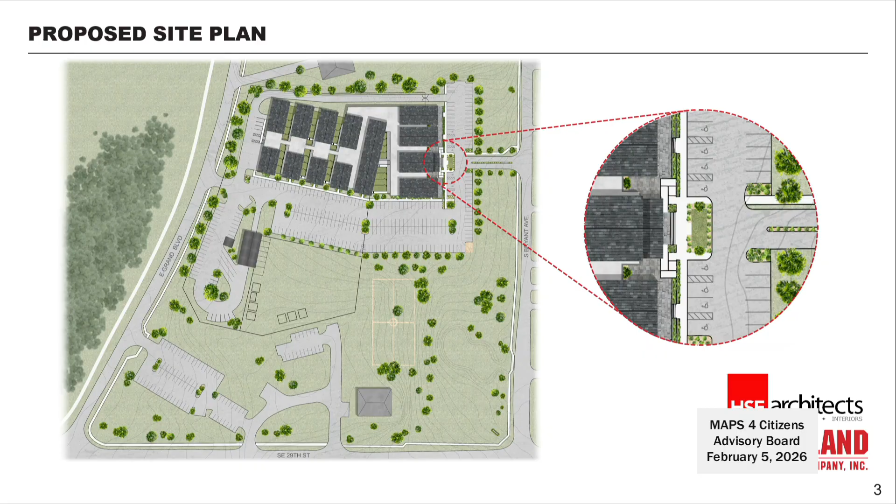Also to remind you, this building will be built in 2 phases. Phase 1 includes the main building on the very far top of this site plan. Then for phase 2, once phase 1 is completed, they will move out of the existing shelter into the new building, and phase 2 would be the removal of the existing building and the construction of the new large animal barn, parking, and horse pasture.

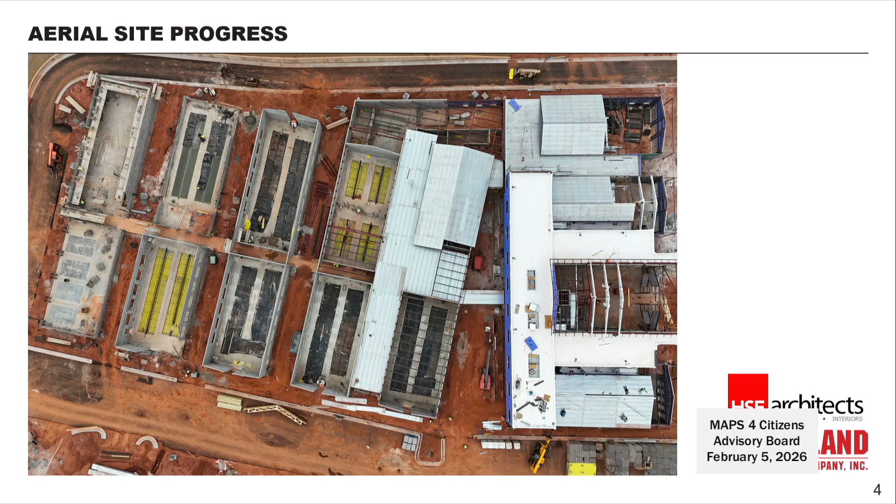You can see in this photo, the roofing—almost all of the walls are complete and the roofing is beginning to be installed there on the front half of the building. The silver part is roof decking that goes underneath the roofing, and the white part is the final roofing on those flat roof areas. So we're making good progress there.

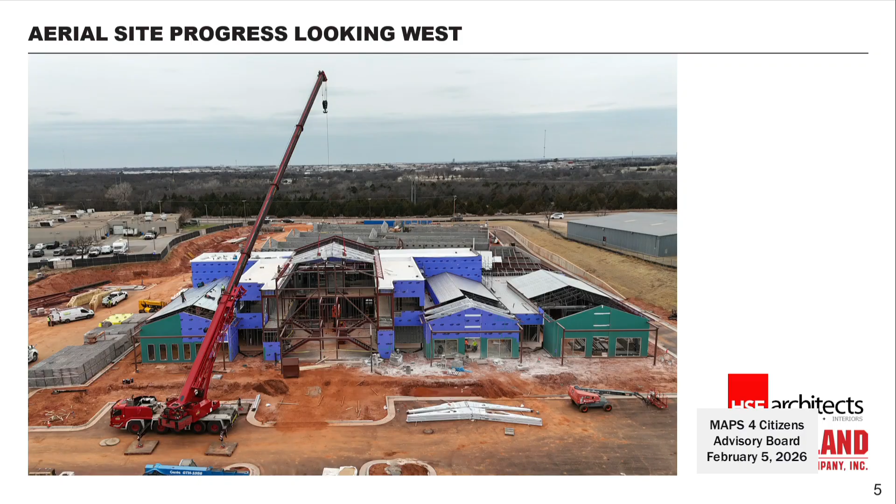Here's another shot, an aerial view from Bryant Avenue looking toward the west. Again, you can see on the very far left is the training room, which we are now calling Commons, and to the right of that is the two-story adoption lobby. To the right of that is the intake lobby, and then the clinic lobby on the very far right. To orient you, there's an existing Oklahoma City Police Department building on the very far right, which was existing to remain. On the very far left, in the background, is the existing animal shelter facility, which will be removed, and that's where the large animal barn will be installed.

In this aerial view, looking from the Bryant side toward the northwest, you can get an overall picture. You can start to see where all the parking lots will be. The concrete curbs and gutters are installed, and the light tan dirt areas will all become asphalt paving. On the far right, you can see where the main public entrance off of Bryant will come in. At the top of the slide, there's another entrance off of Grand Boulevard, where staff and animal control officers will come in and out daily.

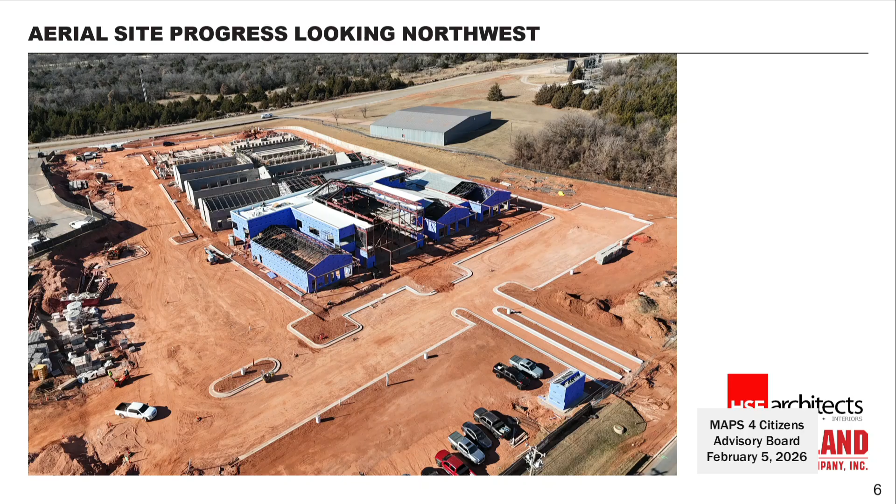Here's another look at the front. That's the two-story adoption lobby right there in the middle.

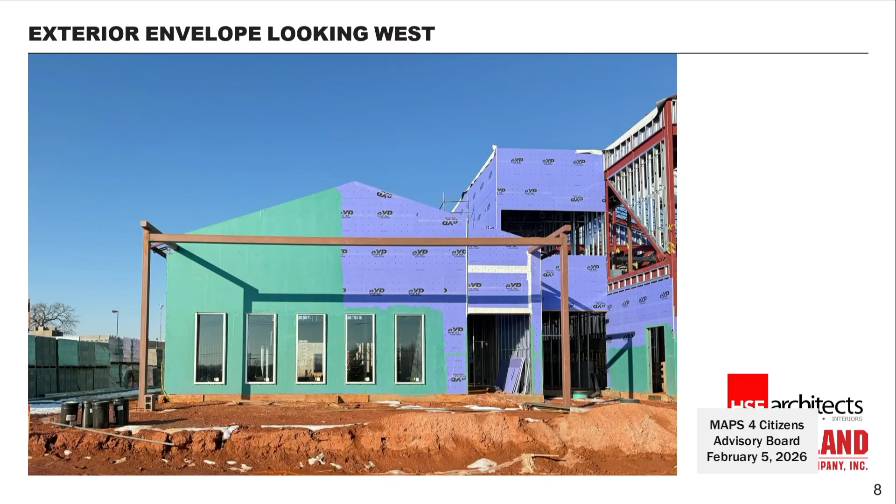This is a close-up of the commons area or training room. The purple you see here is not the final finish—we will not have a purple building. That's the exterior sheathing that goes up first, and then they apply this green liquid-applied waterproofing over top of that sheathing. The final exterior siding and concrete block will be installed over that.

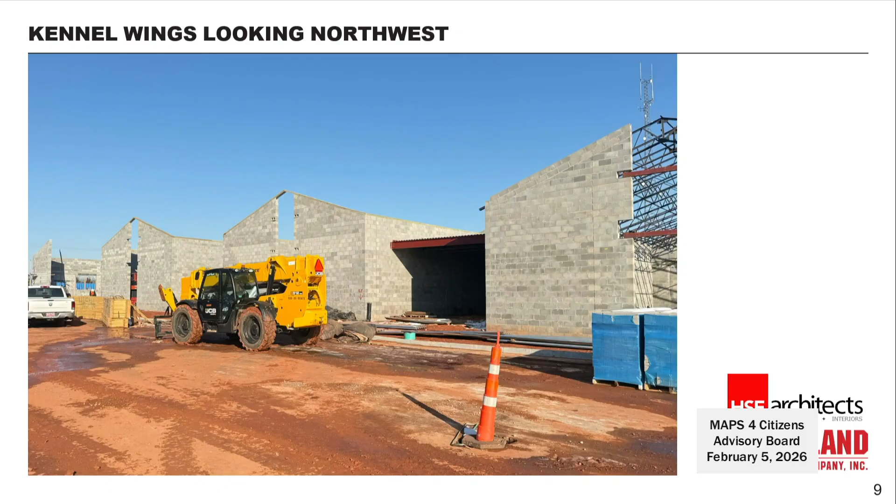Here's a look at the south end of the kennels. This is standing in what will be the south parking lot, looking back toward the kennels. You can see the concrete block work is nearing completion, and the steel roof structure is beginning.

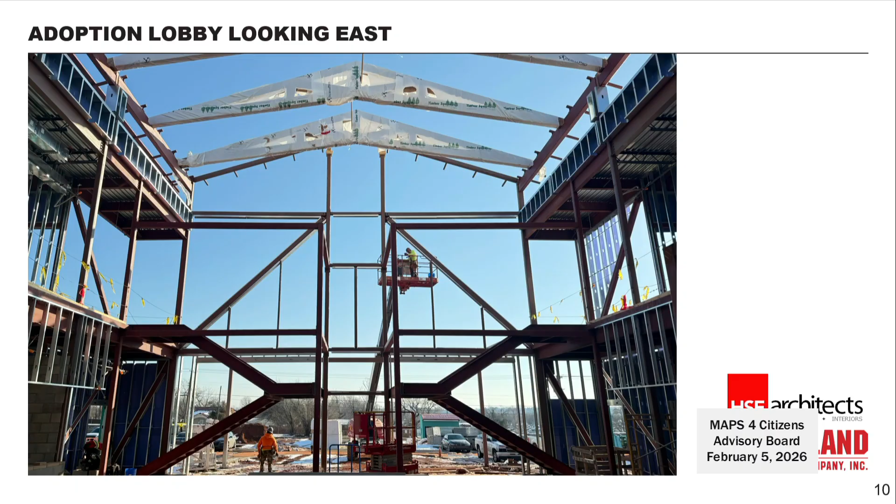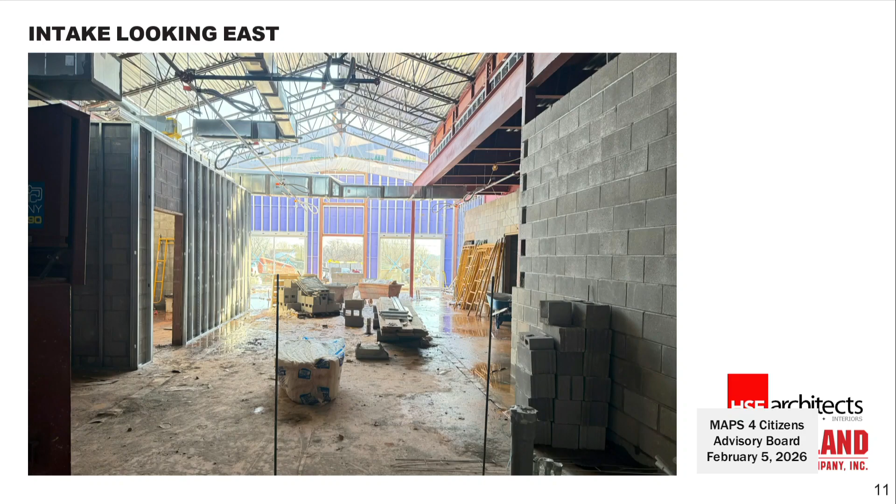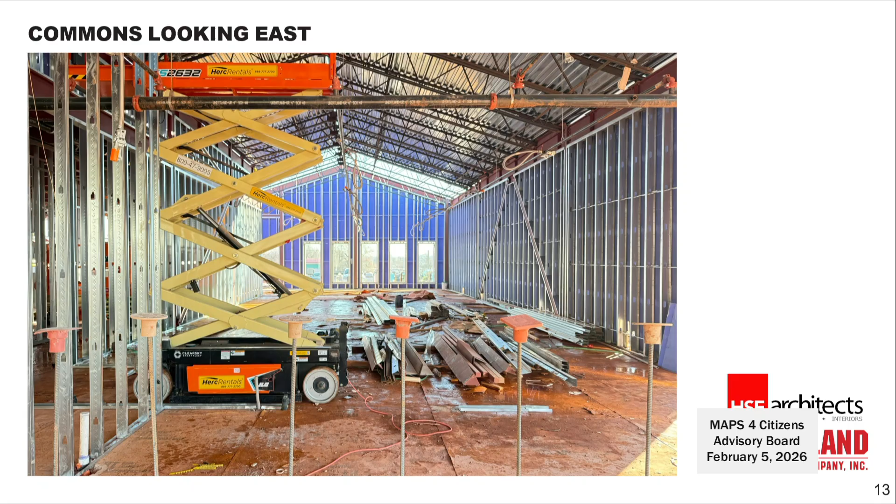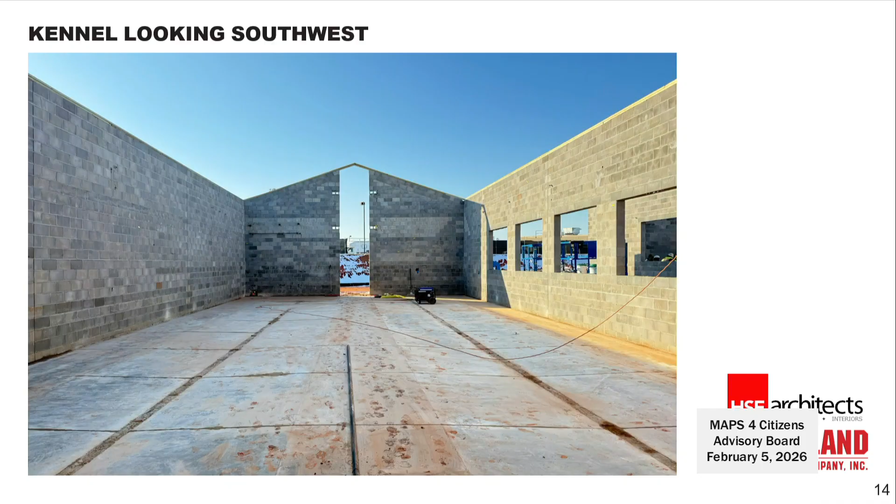Here's an image standing in one of the kennel wings, looking towards the southwest. You can see the openings on the right will become windows to allow light into these kennel rooms. There are two linear strips down either side—those are the floor drains that will be in the kennel areas.

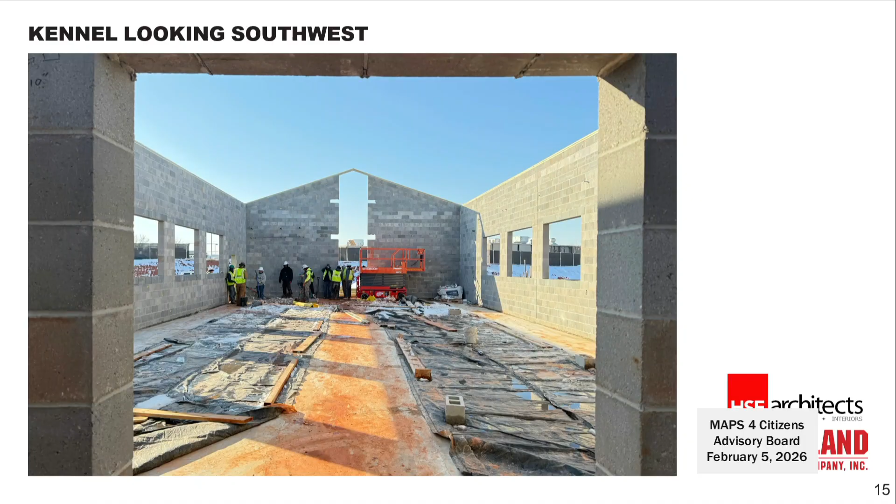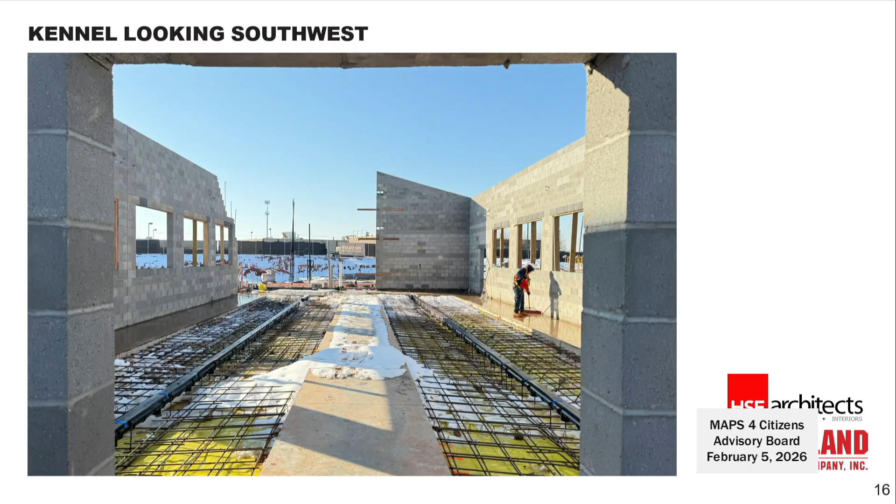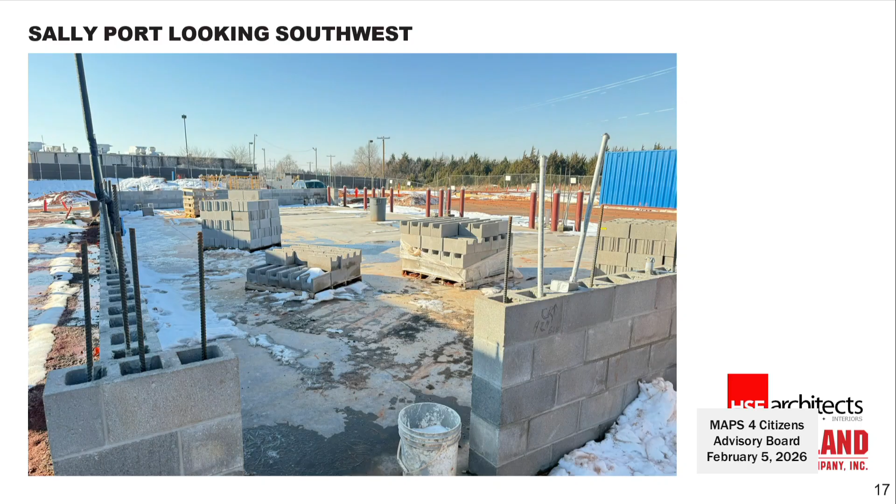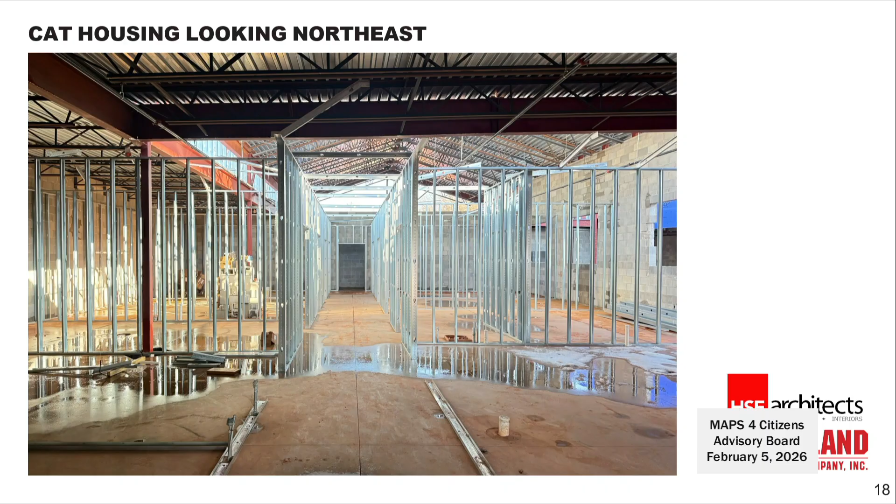This is the cat housing wing. The roofing you can see here is already installed, so they've started installing the steel metal framing on the interior of the building. Once the building is dried in, we'll begin to put sheetrock on those walls.

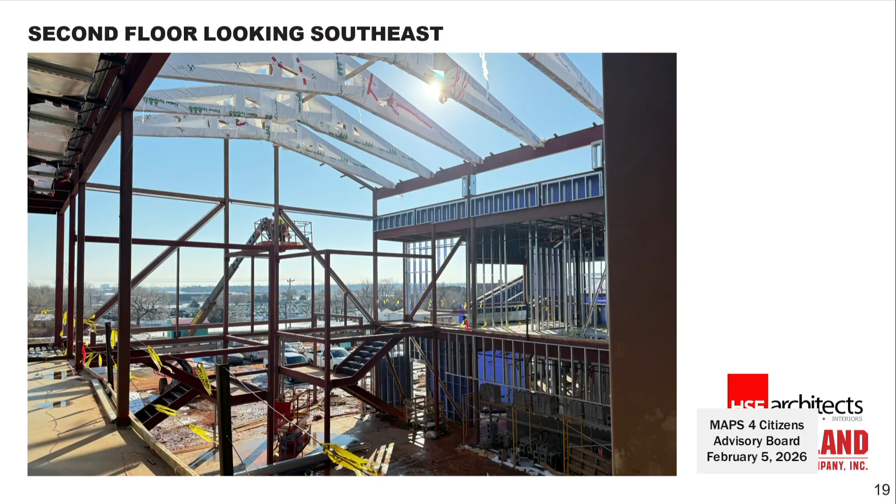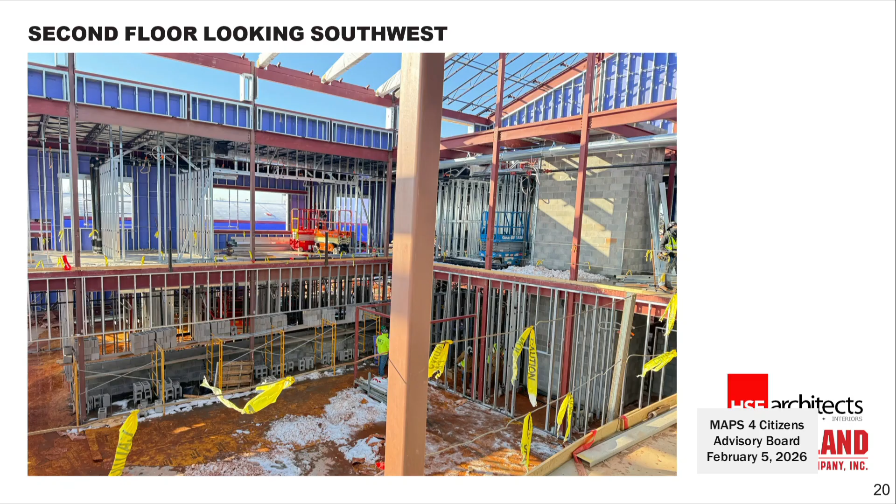Here's a view from the second floor looking into the adoption lobby, looking to the southeast towards Bryant, towards the front. Here's another view standing on that second floor, looking in the other direction towards the southwest. When you look across this lobby, you'll see there will be glass walls on both sides of this adoption lobby, so you can see from one side over to the other.

I want to review change order number 3 for your approval today, and I want to review some of the items in this change order. I'll highlight some of the major items.

Item 1 is electrical gear modification, for an automatic transfer switch that needed to be increased from 1,200 amps to 1,600 amps in order to accommodate the load for the emergency generator.

Items 3, 6, and 13 through 16 are all structural modifications that were determined throughout the shop drawing review phase and coordinating with the actual steel and truss fabricators. So there was some additional steel required during that process.

Item number 7 and item number 19 were both related to an unforeseen fiber optic line discovered during construction along Bryant Avenue. There were other utilities that had to be relocated, and the detention pond was right on top of that fiber line. It had to be reconfigured to avoid it.

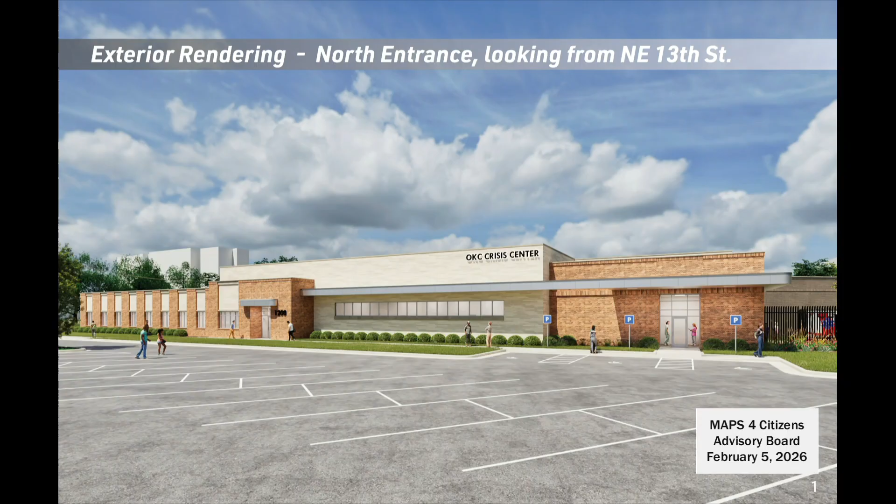This is the final plan presentation for the Mental Health Crisis Center. This project is at 1200 Northeast 13th Street. This is an exterior rendering of the front of the building, and this is an exterior rendering of the front of the building, but of the administration wing.

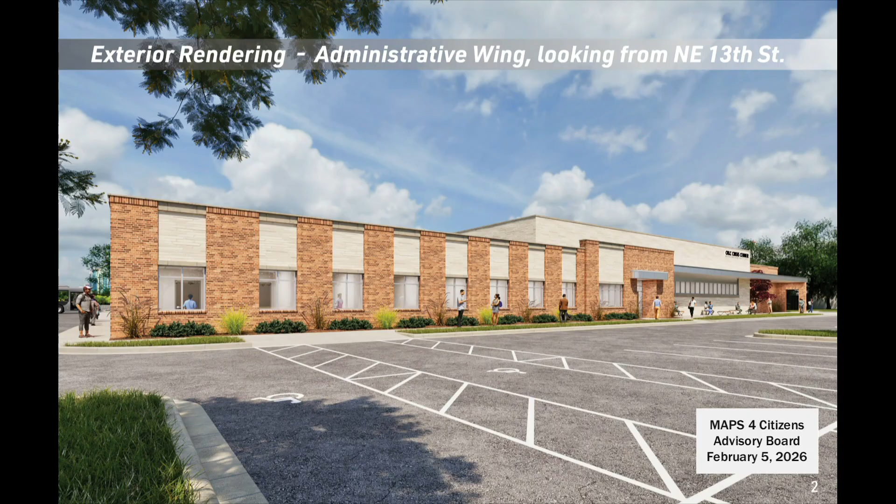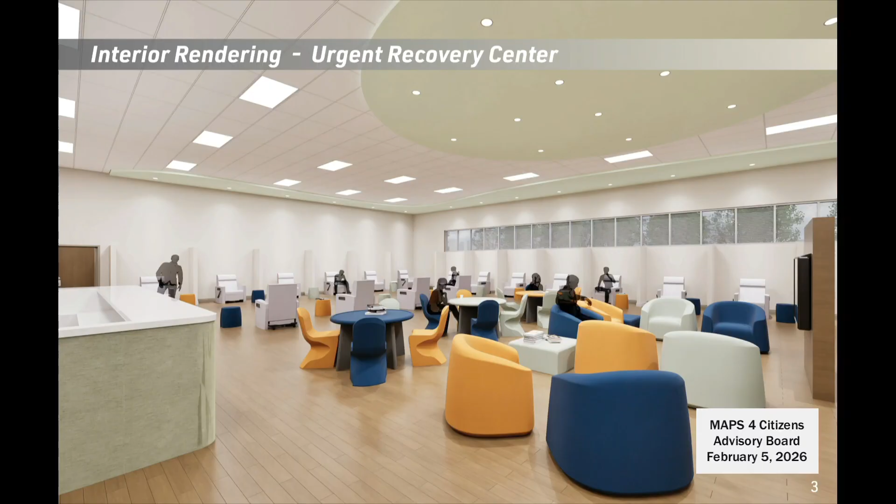This is the floor plan for the project. Our project had 5 different components to our program: the entry and exit, the Urgent Recovery Center, the Crisis Stabilization Unit, the shared services, and the administrative area.

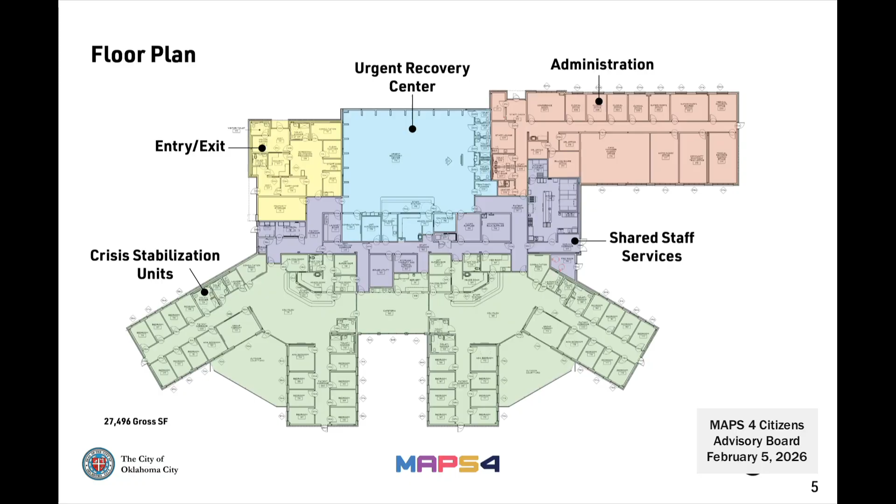To start with the entry and exit, we have 2 entries and exits into the facility. The first is going to be a walk-in entry from the parking lot. The second entry is going to be a first responder entry, and that will be in a secured parking area just for first responders.

Both of these entries are going to funnel into a central screening and processing area. Off of that screening and processing area, there will be a toilet shower room, a consultation room, an exam room, a clean clothes storage, and a property storage. Also centralized into this space is the security office, which will have visual access to both the walk-in entry and the first responder entry, as well as overlooking the screening and processing room.

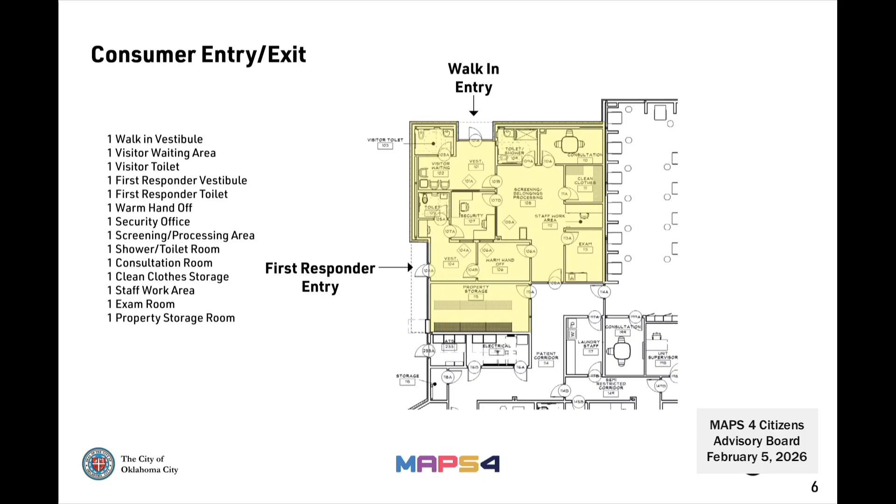Moving on to the Urgent Recovery Center, this will consist of mainly one large room that will hold up to 25 observation stations and a centralized social living space. Off this large room, there'll be individual toilet and toilet shower rooms, a calming room, a treatment room, and a consultation room. The staff will have two different work areas in this space.

The first will be an open staff station that is within the room itself. Then they will have a secure work area behind a set of doors that will have visual access into the space as well. Then in this staff space, there will also be a unit supervisor office and a medication room.

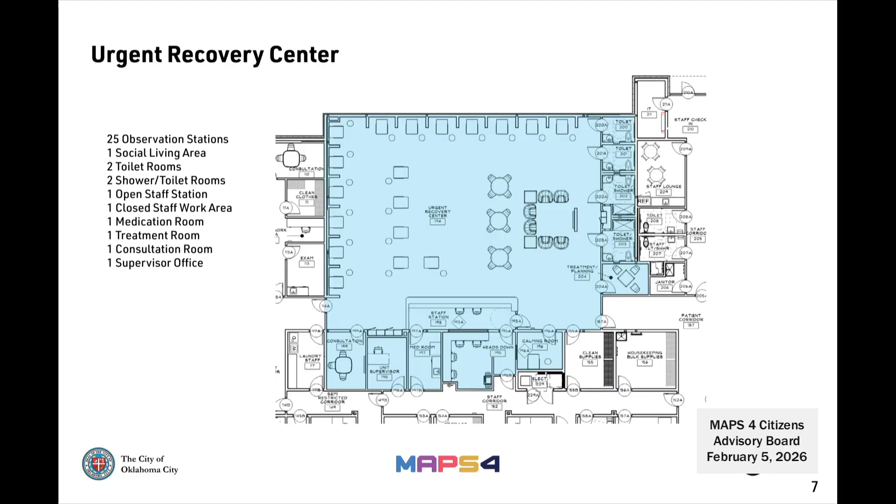Then we move to the crisis stabilization unit. There will be two separate independent units for this project. This is one of the units. They will be separated by a shared cafeteria.

Each of the units will consist of 16 bedrooms with a centralized social living space. Off the social living space, there will be a group therapy room, a laundry room, individual toilets and toilet shower rooms, a treatment room, a calming room, and a consultation room.

The staff area is going to be set up very similar to the Urgent Recovery Center. There'll be an open staff work area in the social milieu itself, and then there'll be a secure work area behind that. In the secure work area, there'll also be a staff toilet, an individual staff restroom, a unit supervisor office, and a med room.

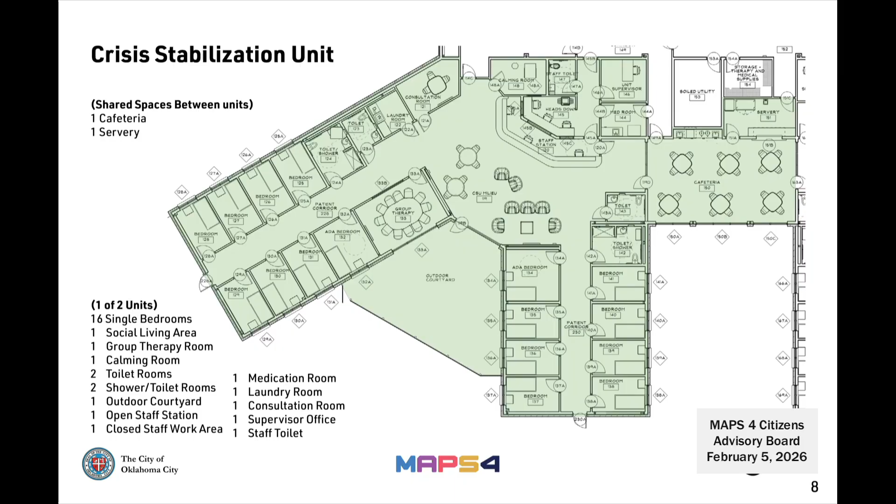Each individual stabilization unit will also have an exterior courtyard for consumers that they will be able to access with supervised staff.

Our next component is the shared staff services. This will be staff only; consumers will not be allowed in these spaces. This will consist of the kitchen, the soiled utility, clean supplies, any bulk supplies, housekeeping, and a laundry room, as well as general building, mechanical, and electrical rooms.

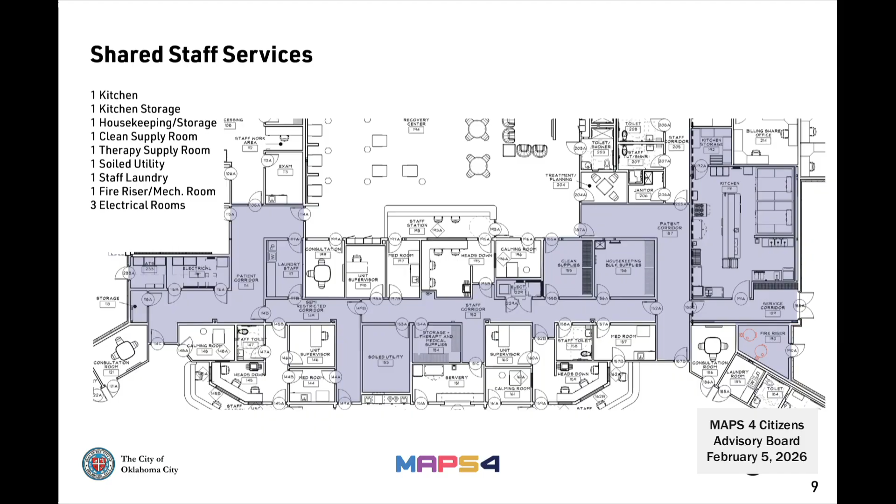We will have a servery off of our cafeteria where they will roll in heated cabinets that have trays pre-made from the cafeteria. Then they will serve that through an open overhead coiling shutter door into the cafeteria. There will also be a refrigerator and a microwave in the servery.

They will store meals on trays in the refrigerator and warm them up as needed for anyone that may come in after meal times or between meal times that needs a hot meal. And then there'll be beverage dispensers and ice machines in the cafeteria.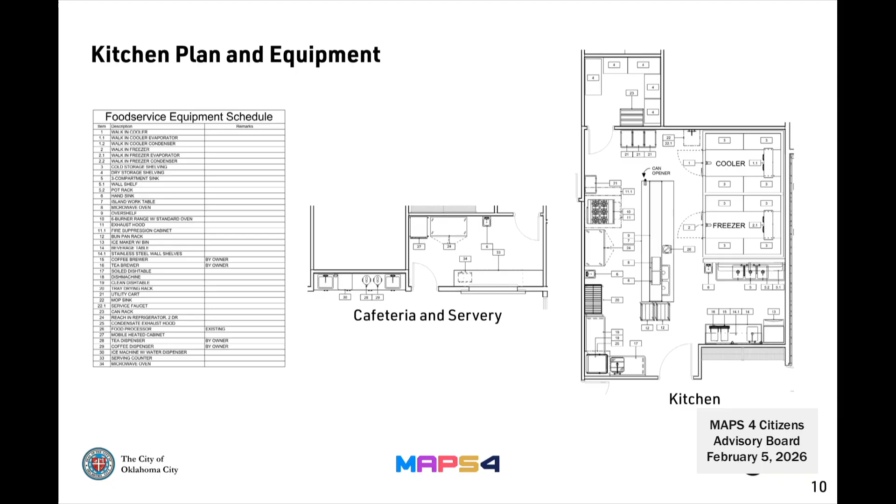We have gone through and done our drawing coordination. We have taken the architectural components, the structural components, and the building system components, including mechanical and electrical systems. We have built these all in 3D models and combined them into one model in the effort to look for any conflicts that potentially might come up during construction.

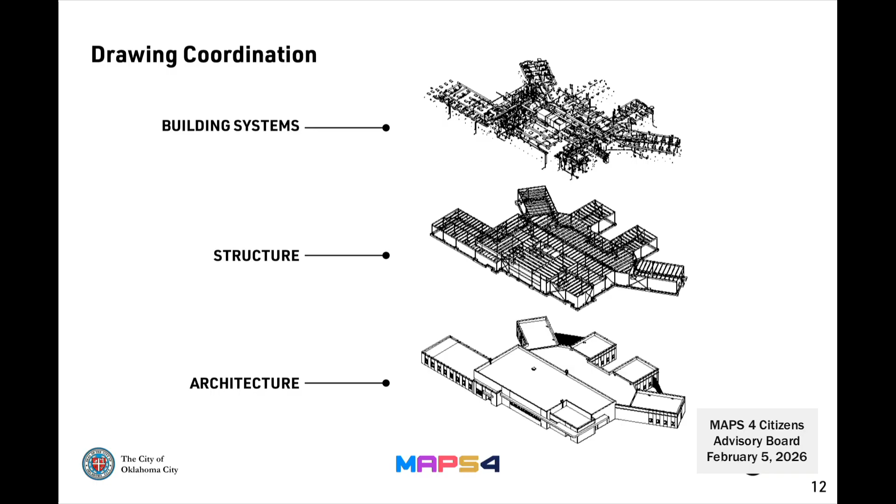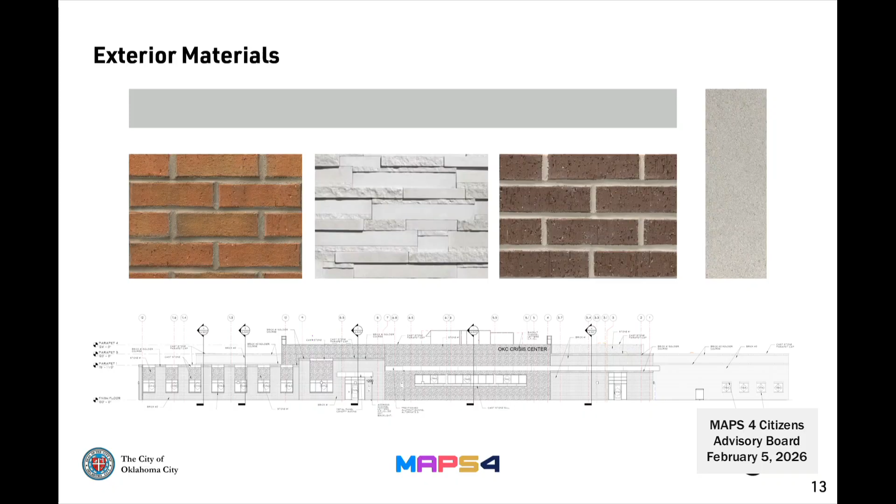We have done exterior building material selection. We will have two different colored bricks, one stone, and cast stone accents. There will be anodized aluminum storefronts to match the anodized aluminum canopy on the front of the building as well.

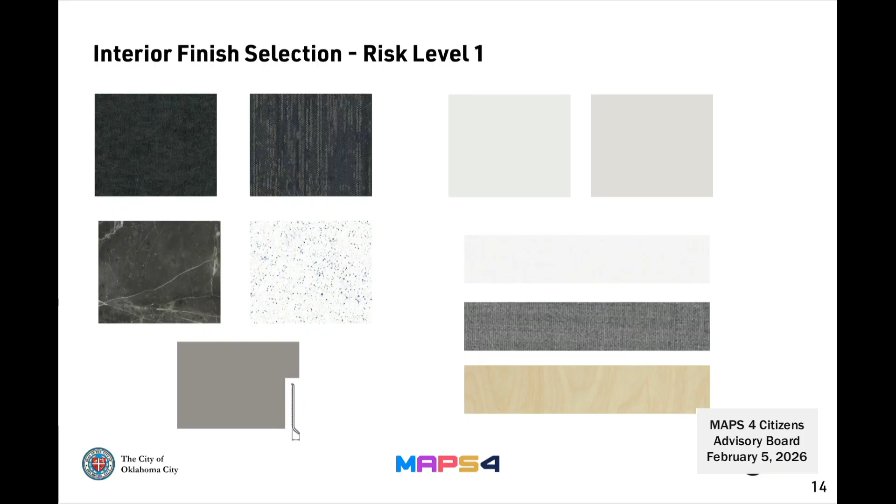We have done interior finish selections. This is for risk level 1, which is the staff-only areas. We kept it very simple, very neutral.

Moving into risk levels 2 through 5, this is where the consumers will be in these spaces. We've brought in warm wood tones, soothing colors, murals with nature scenes to try to make this warm and welcoming and less institutional.

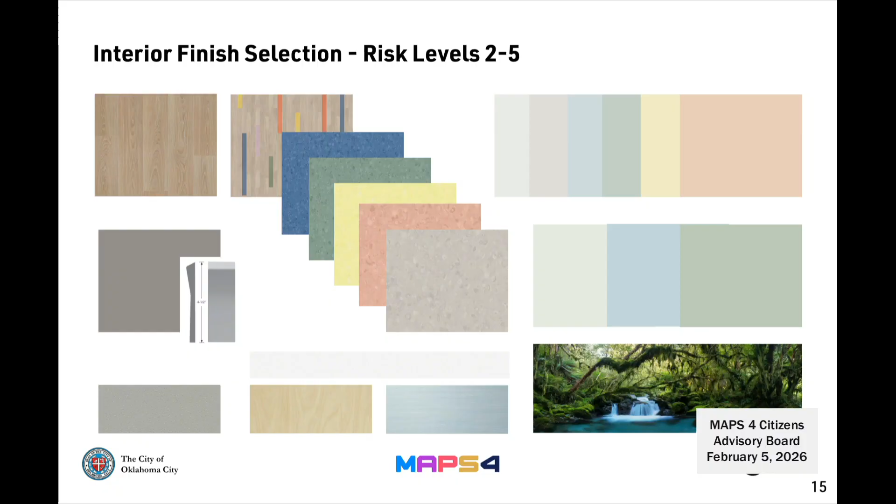We have gone through and done all the product selection as well. We've worked with our behavioral health consultant to evaluate all of the products available in the market. We have evaluated ligature resistance, self-harm, durability, and cost. In these reviews, we've also tried to keep in mind that we want to keep this looking as homey as possible.

So we've made decisions such as, instead of picking a steel sink and steel toilet, we've gone ahead and got the powder-coated option, so they're white, so they look more like your residential toilets.

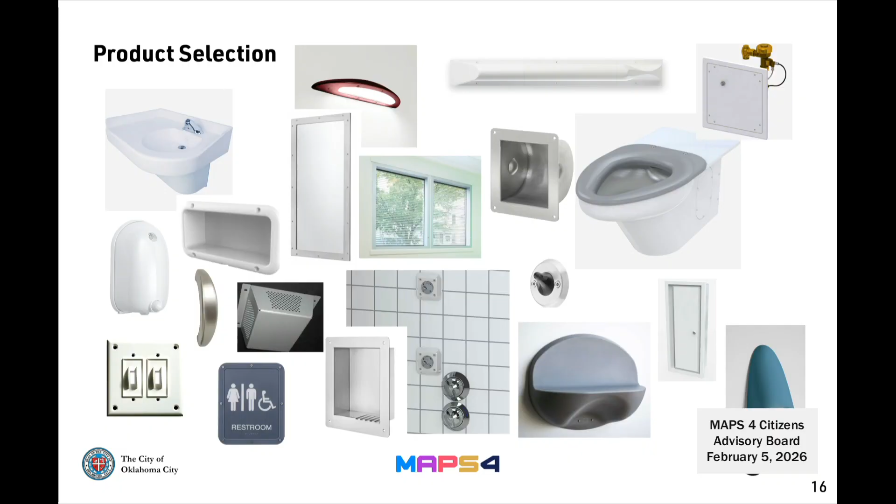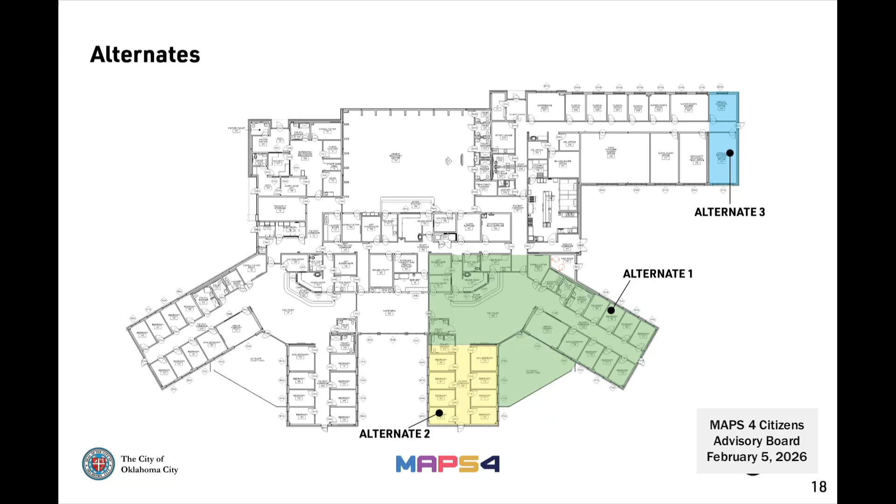We have 3 building alternates with this project. The first one is in green, and that includes 8 beds in the CSU unit, the social living space, the outdoor courtyard, and the staff support areas. Alternate number 2 is in yellow, and that is an additional 8 beds in the CSU wing. Alternate number 3 is in blue, and that is some administrative areas that can be housed off-site.

Our project budget for this project is $11,456,100. Our base bid construction estimate is $11,332,500, and that includes 16 CSU beds.

Alternate number 1 is $1,631,255, and that includes 8 CSU beds plus additional support spaces. Alternate number 2 is $802,730, and that includes an additional 8 CSU beds.

Alternate number 3 is $157,585, and that includes the administrative space. Alternate number 4 is $48,415, and that is for a detention pond.

If we select all 3 alternates to construct, we will be right at the edge of whether or not the city will require a detention pond. So until we get that final determination from them, we've gone ahead and done it as an alternate so we can see the cost and have that cost.

A couple of items to note: alternate number 2 cannot be taken without alternate number 1; they must be taken sequentially. If we're able to take alternate number 1 and alternate number 2, which would give us the full 32 beds for this facility, we have received a pledge for a private donation of $1 million to add to the project budget.

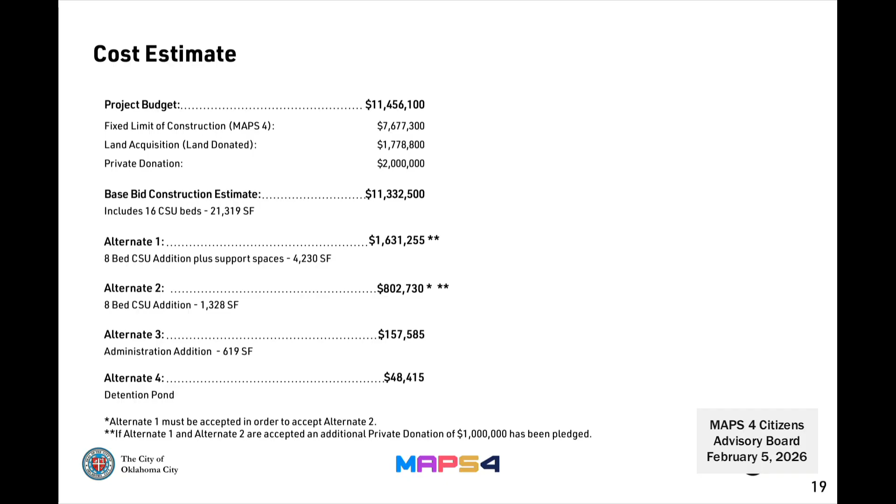Looking at schedule, the building demolition of the current site is going to drive this schedule, but this is, from our knowledge, the best we have at this time. We expect site demolition to begin at any time, and we'll get a schedule at that point to know what their demolition schedule looks like.

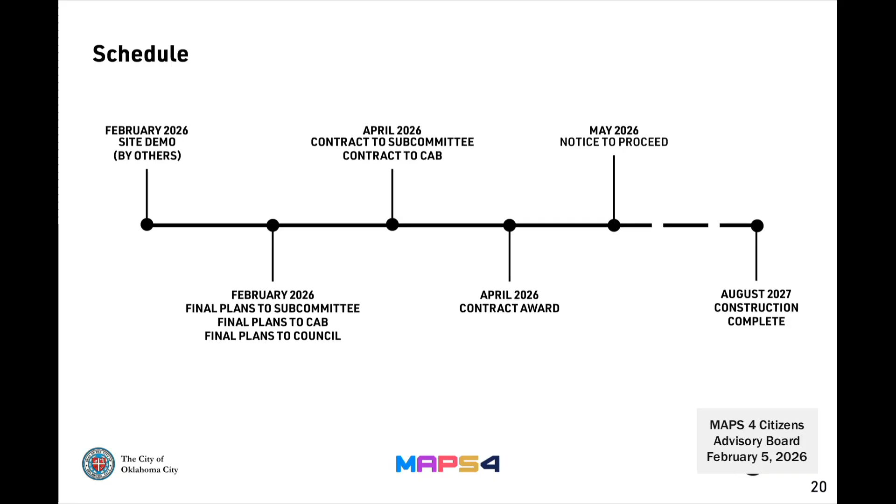We are currently bringing final plans for approval from the committees. We hope to send this project out to bid this month and get bids to come in March, which would allow us to come back in April to you with a recommendation for contract and contractor. If that happens and we're able to award the contract in April, we would be able to give notice to proceed in May to the contractor, which would put us at a construction completion of August of 2027.

Is there any questions? Okay, any questions? It's good, done a lot of work. Did you have a question, Jessica? Okay, thank you so much.

Okay, so we need a motion and a second to approve the final plans and specs.

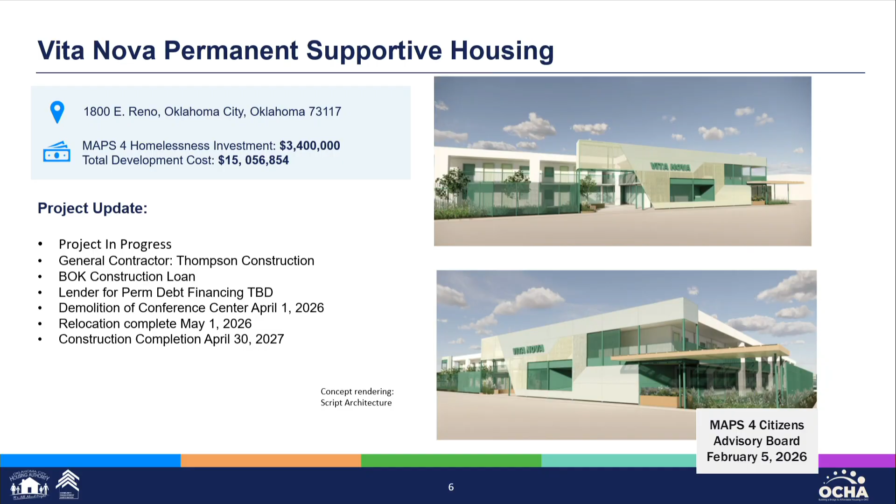When we look at the leveraged funds from these projects, right now we still have the $2.5 million committed to Creston Park, but we're refinancing that project and it's on hold while we have community conversations and community engagement with the assistance of Councilor Pennington.

We have a disparate group pulled together, including Restore OKC, Northeast Placekeepers, the City Planning Department, other advocates from the community, and the Alliance for Economic Development. Everybody's at the table looking at the best and most acceptable way to proceed as the community weighs in on the plans for this site.

Right now, we've provided multiple proposals. We have agreed to table those proposals while we convene these meetings and come out with a plan that hopefully can satisfy everyone. The only thing I have to say is we do have a timeline with HUD. The approval from HUD is already there for us to convey this property to our nonprofit development arm, or we could sell it at fair market value to someone else. So these are some of the options on the table right now, but there is no clear pathway forward at this time. We're just in the engagement process right now.

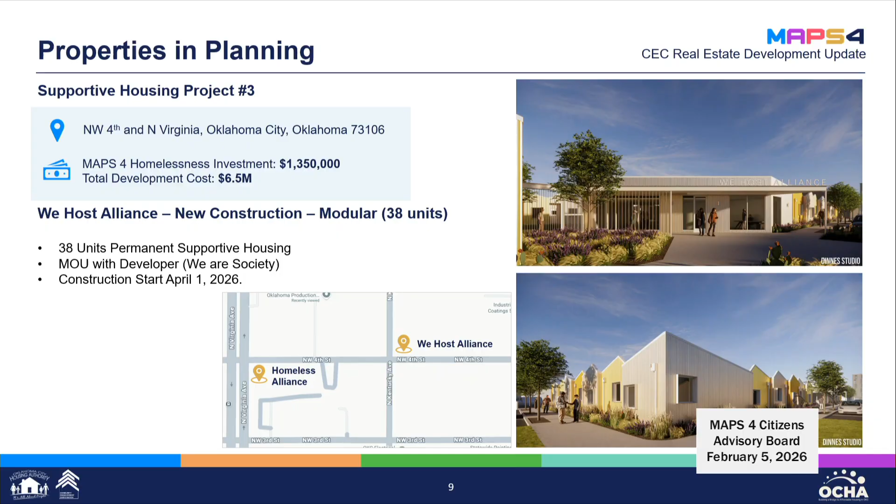In planning, this is the We Host Alliance project located across from the Homeless Alliance campus. We have the MOU with the developer. There'll be 38 units there, all with project-based vouchers to guarantee affordability for these supportive housing units, which will target people experiencing homelessness in the 0 to 50% of AMI area income levels. So they will all need these vouchers. $1.35 million from MAPS, but the total project is $6.5 million.

Here on the first workforce housing project, again, this will be 80 to 120% of AMI — that's the units that qualify. This project will finance units available to 80% of AMI households, along with 55 project-based vouchers from the Housing Authority, so that we're providing opportunities for lower income families with a voucher to move into this area where there is no affordable housing. This is a very opportunity zone area where there's goods, services, jobs, grocery stores, all kinds of amenities, but no affordable housing. So these 55 units will come into this mixed income project.

The MOU with Elmington is signed. It's under subsidy layering review right now. What that means is that when there are HUD dollars, like with the project-based vouchers, HUD must approve the projected rents, go through the other subsidies being used to finance this project, and make sure everything is in compliance. That should be completed, and we do expect construction to start in the middle of this year.

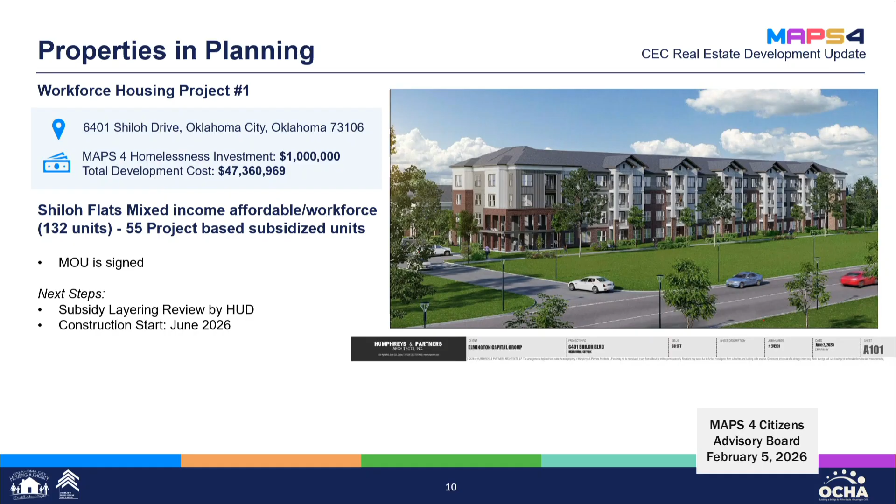Can I ask a question real quick? Yes. And I appreciate your work — I'm not questioning your work, I just want to make sure this is right in my head. Total development cost is for the purchase and redevelopment of the property, correct?

Total development costs means all the hard and soft costs that come into the financing of the project. So that would be the total hard dollar construction cost, plus all of the costs it takes to file for the tax credits and have syndicators. There's a lot of other soft costs involved in these projects. So when I talk about total development costs, I'm adding all of that together, the administration of the project.

That doesn't include the subsidization, does it, or does it not? So that comes from HUD. The cost of subsidizing the units comes out of the voucher contract that we get every single year at the Housing Authority from HUD. It's part of the voucher allocation that we have, which is capped.

So what we can do is we can commit 20% of our total vouchers under HUD regulations towards project basing them at other locations, either owned by the Community Enhancement Corporation, or in this case, Elmington Affordable's partnership with the CEC, where we are in the ownership structure, so we can award vouchers to this site. But that does not come out of MAPS funding at all. Right, that is HUD funding going to this project. That's why it has to go through subsidy layering review.

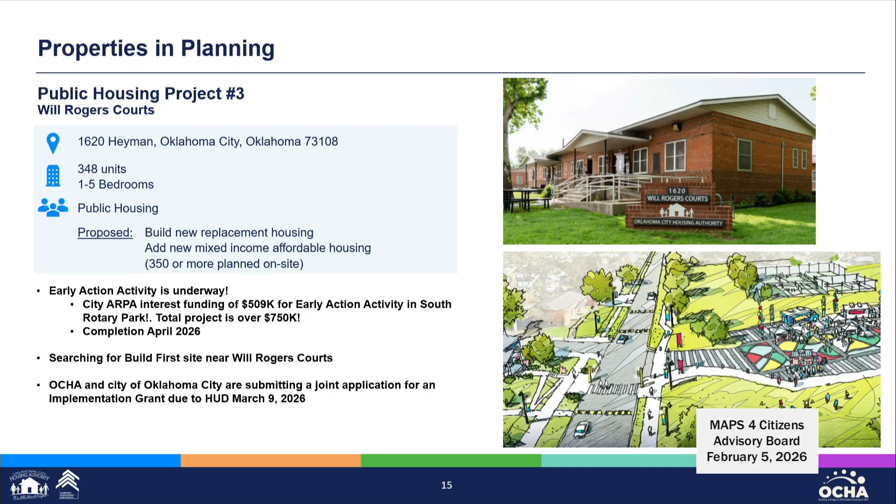We were a Choice Neighborhoods Planning Grant co-applicant with the city, and one of the requirements for the current NOFO, the funding opportunity from HUD for the $26 million award, is that you were a previous planning grant award. We had that already with the city. We completed our planning grant, so we're meeting that threshold to apply for the $26 million. But it will be highly competitive. We're working on that application right now, and we're trying to secure a build first site near Will Rogers Courts so we can start doing new construction as part of the replacement housing when we start relocating everybody when demolition has to begin. So this is just an application we're submitting right now.

18.5% is out of the total projected development cost, but we're just in the planning phase on that. So these projections from the second allocation can really be moving. As the total development costs on these projects change over time, the percentages will move around. These are early projections, but I want to show you what we're trying to do to leverage dollars back, because in our original operating agreement, we said we were going to leverage over $400 million. So this is why we're trying to track that for you by each project.

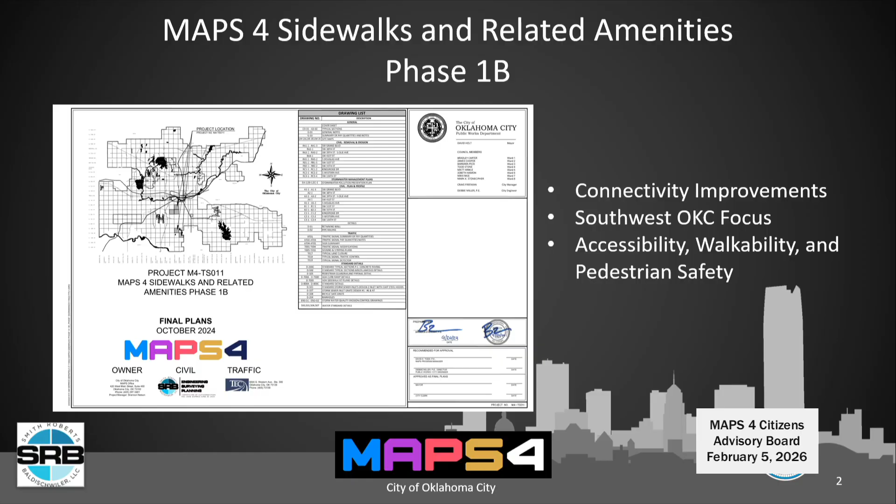This is a connectivity project focused on 3 pedestrian priority areas, or PPAs, in the southwestern part of the city. The goal was to expand the city's network of walkable sidewalks and modernize older sidewalks up to ADA standards, thereby improving accessibility and safety for pedestrians.

This project started on January 20th of last year and was awarded to EMC Services in the amount of just over $2,286,000. We're entering our 13th month of construction, and we hope to be finished pretty soon.

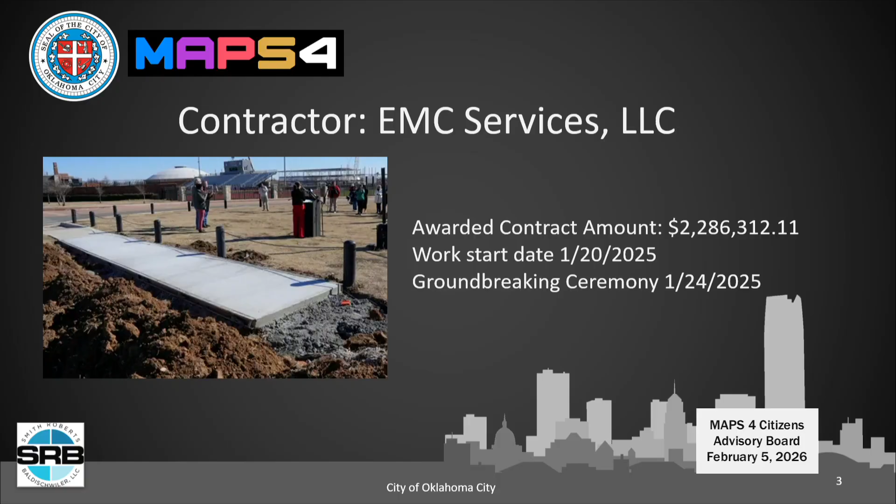The first PPA was situated around Western Avenue near Southwest Grand Boulevard, and this PPA is largely defined by the Capitol Hill High School, the Southwest Medical Center, and neighborhoods and businesses.

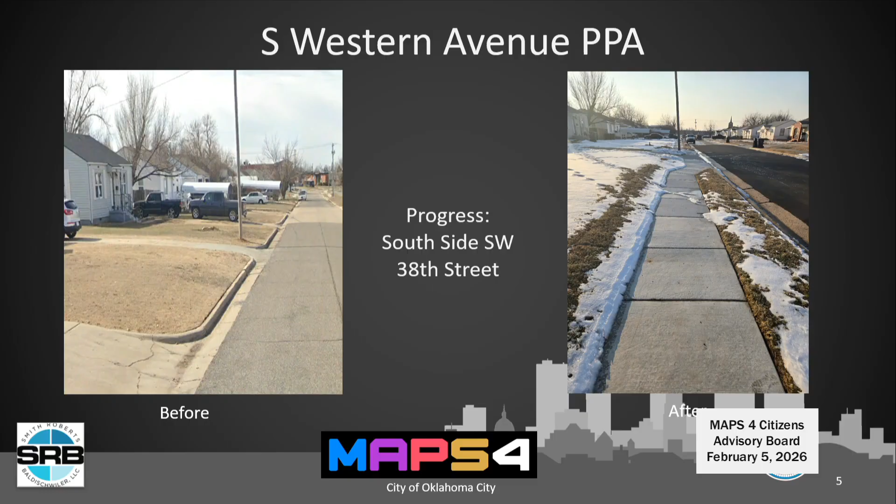The second PPA was Pennsylvania Avenue near Southwest 51st and 55th Streets. Some notable landmarks in this area are U.S. Grant High School, Coolidge Elementary, and neighborhoods.

When we last presented in September, only 55th Street was completed. However, now all alignments, in addition to the added new alignments along Villa and Agnew Avenues, are finished.

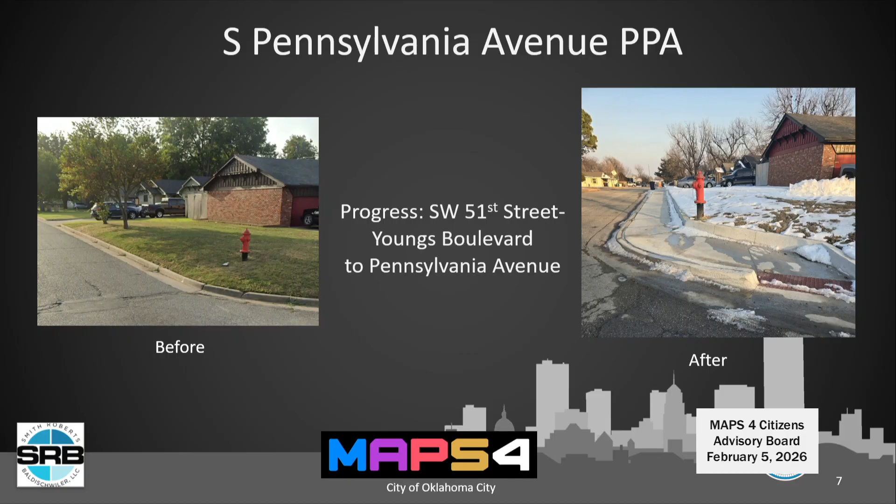Here are some progress photos picking up where we last left off along Southwest 51st Street. On the after photo on the right, you can see a great example of variable height curbing, or integral curbing, on the sidewalk that is used to mitigate property impacts.

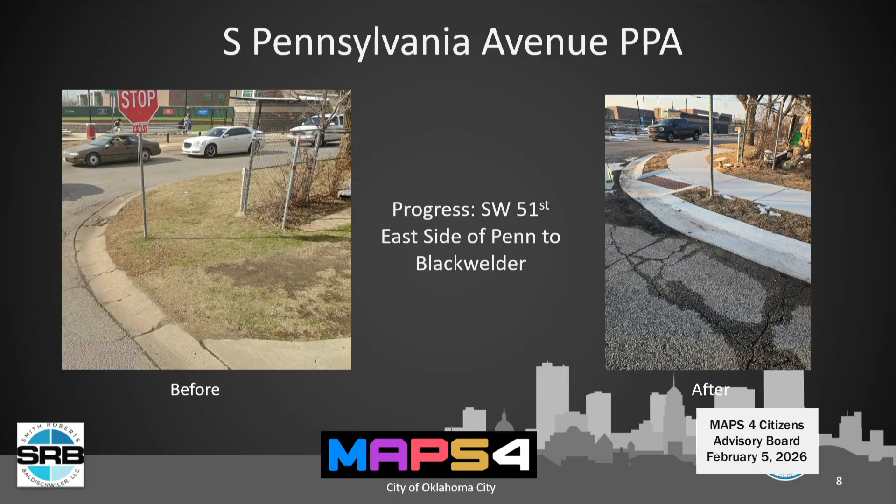These blocks east of Penn on Southwest 51st Street had a very deteriorated gutter line like what you see on the before photo on the left, and this will lead into one of the amendment items that I'll talk about later.

Although it was unfortunate that we couldn't install the north side sidewalk, this project was still able to install a sidewalk on the south side, so there's still a pedestrian pathway for locals on these two blocks.

Our third and final PPA was called Far South OKC, and this is loosely situated around Western Avenue near Westmoore High School. This area is largely defined by the arterial roadways of Western and Southwest 134th Street, the MAPS 3 Health and Wellness Center, and neighborhoods and businesses.

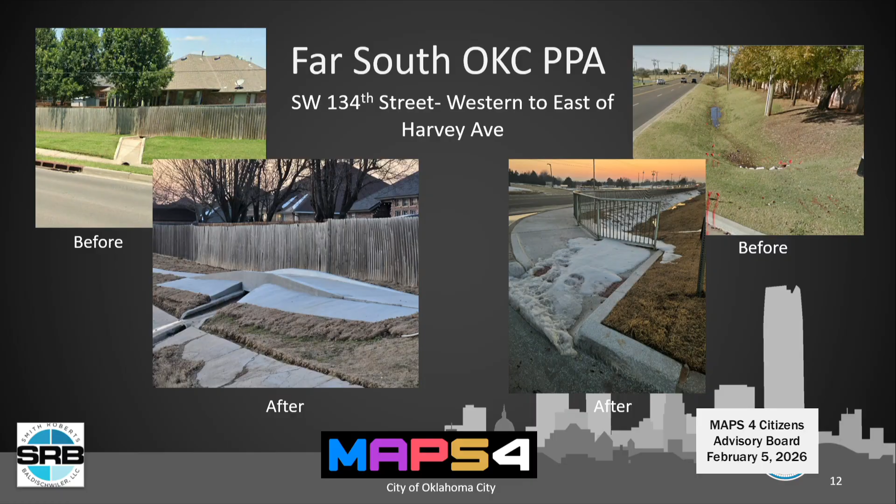Construction is currently underway at Westmoore High School, where this project is installing sidewalk from the school down to an existing sidewalk just south of 126th Street.

And I hear as of yesterday, they probably poured their last batch of concrete. So now we're just looking forward to cleanup and restoration. The contractor will be out of here in the next week or two.

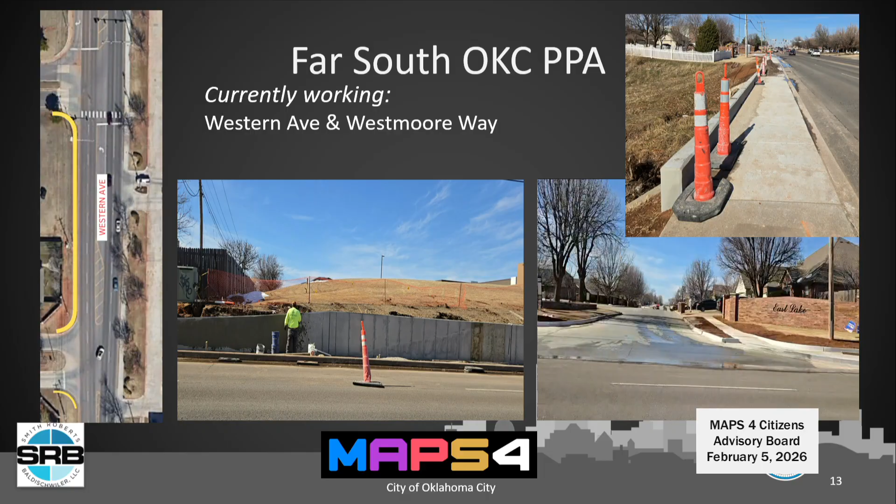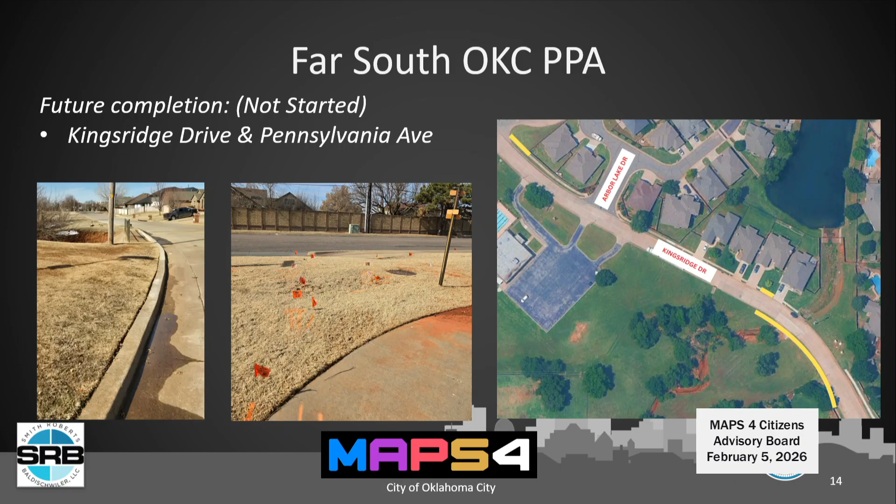After Westmoore, the final alignment will be along Kingsridge Drive, along Merle Medley Park, near Pennsylvania Avenue. For Kingsridge, it's mostly incidental tasks, such as connecting gaps and repairing broken sidewalk panels. Shown here are two examples of the gaps we'll be connecting. We imagine the contractor will only be here for a week or two, and then we're looking forward to final inspections and project closeout.

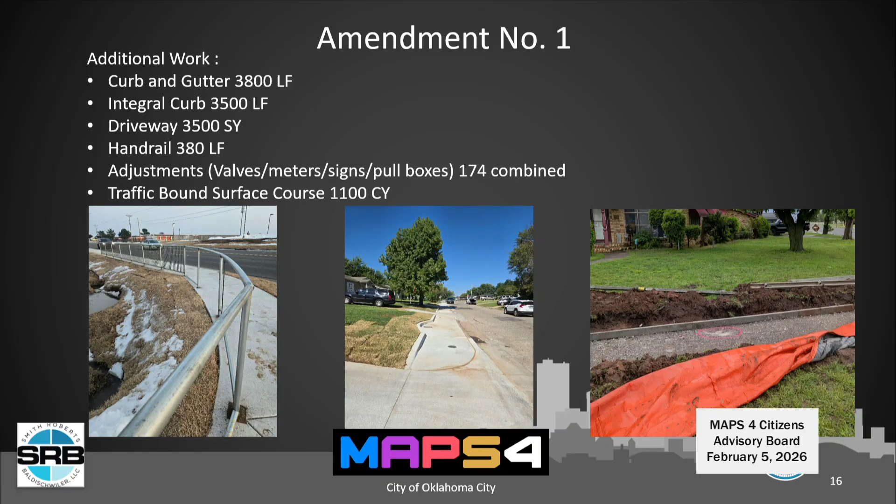Also for your consideration today is change order number 6, which encompasses 55 water meter box replacements. When this project encounters a City of Oklahoma City utility water meter box, replacement is necessary for some, but not all, of those water meter boxes to meet current city standards. In addition, 21 added days is also being requested for time lost due to freezing temperature or rain.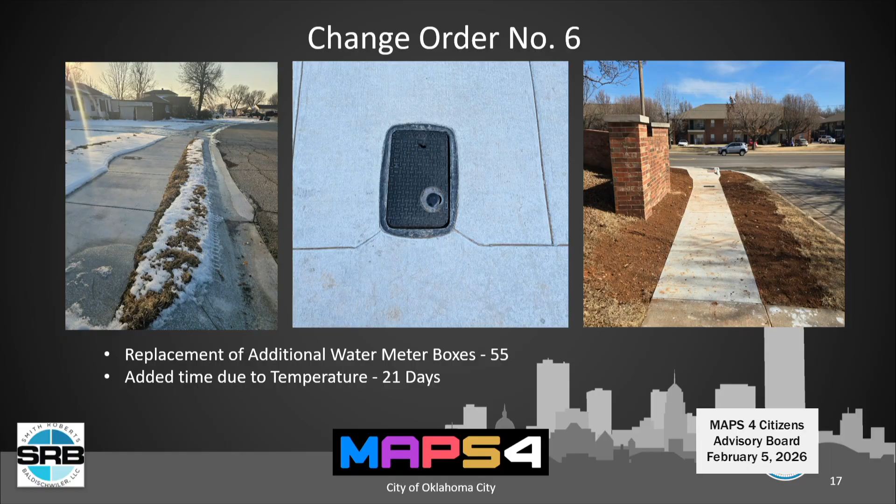Thank you. So with that, we'll move to item 2J, recommend approval of amendments number 1 and change order number 6 that were just described, for an increase of $712,470.

Can I reiterate that that big number is because we've added a lot of sidewalk, so everybody understands that. It's not a problem out there. We've added, and we will continue to do this with our projects. When they come in under budget, we will keep building sidewalks till we run out of money. Love it. Okay, great. Can I get one in my neighborhood?